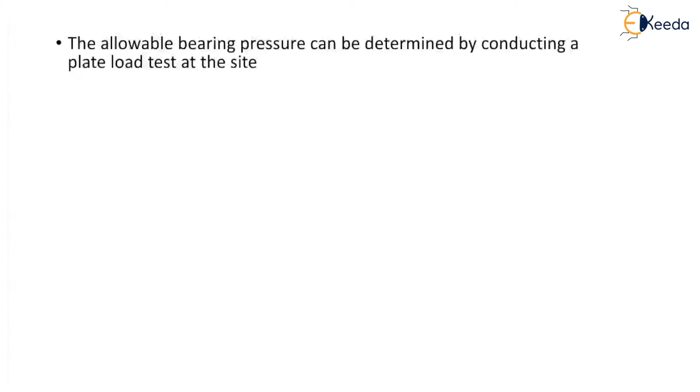The allowable bearing pressure can be determined by conducting a plate load test at the site.

To conduct a plate load test, a pit of size 5 BP into 5 BP is excavated, where BP is the size of the plate. It is excavated to a depth equal to the depth of the foundation, which is equal to DF. The size of the plate is usually 0.3 meters square.

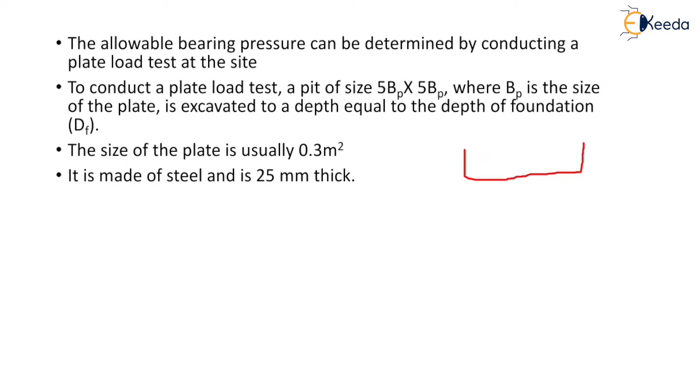It is made up of steel and is 25 mm thick. A central hole of size BP by BP is excavated in the pit.

The depth of the central hole is obtained from the following relation: dp by bp is equal to df by bf. That means dp is equal to bp by bf into df, where bf is the width of the pit and bp is the size of the plate.

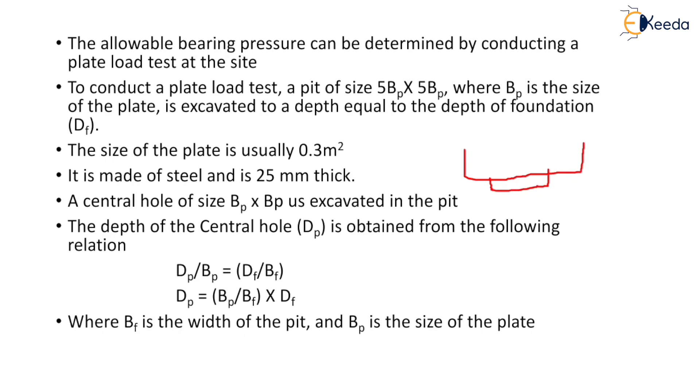For conducting the plate load test, the plate is placed in the central hole and the load is applied by means of hydraulic jack. Here in this figure, we can see that the load is applied by the hydraulic jack.

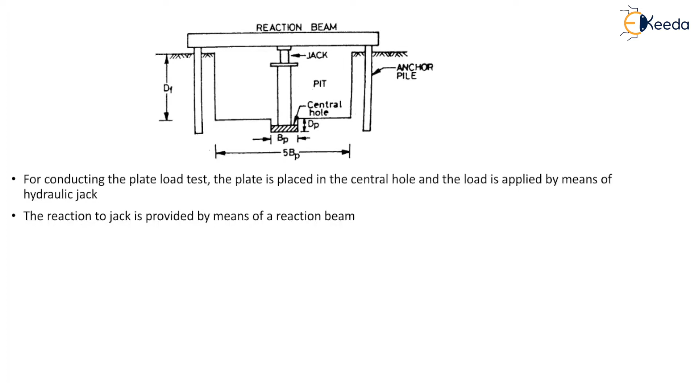The reaction to the jack is provided by means of a reaction beam, which is provided at the top and is supported by columns on either side of the pit.

Sometimes trusses are also used instead of reaction beam to take up the reaction. Alternatively, a loaded platform can be used to provide reaction.

A seating load of 7 kN per meter square is applied first, which is then released after some time.

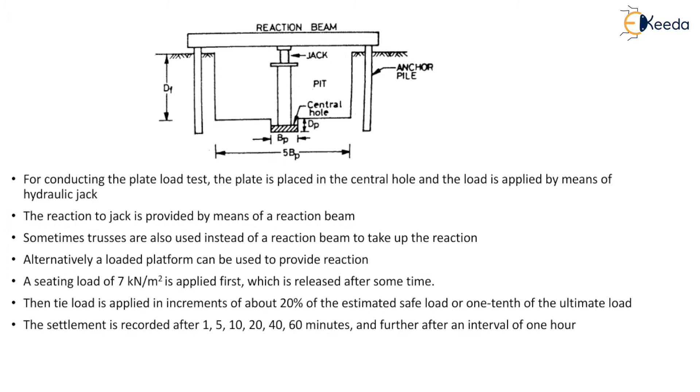Then the load is applied in increments of about 20% of the estimated safe load or 1/10 of the ultimate load. The settlement is recorded after 1, 5, 10, 20, 40 and 60 minutes and further after an interval of 1 hour.

Thus, hourly observations are continued for clayey soils until the rate of settlement is less than 0.2 mm per hour. The test is conducted until failure or at least until a settlement of 25 mm has occurred.

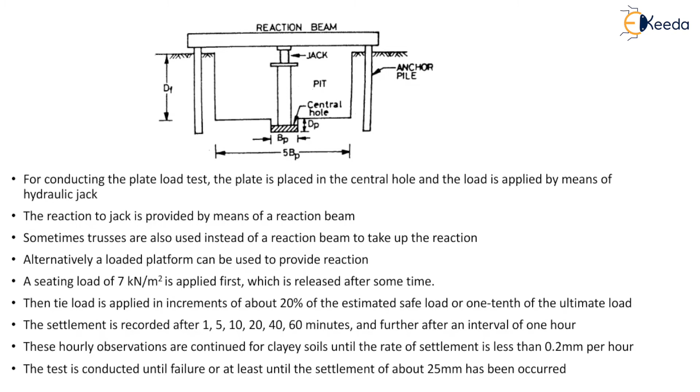The ultimate load for the plate, denoted as QUP, is indicated by a break on the log-log plot between the load intensity Q and the settlement S.

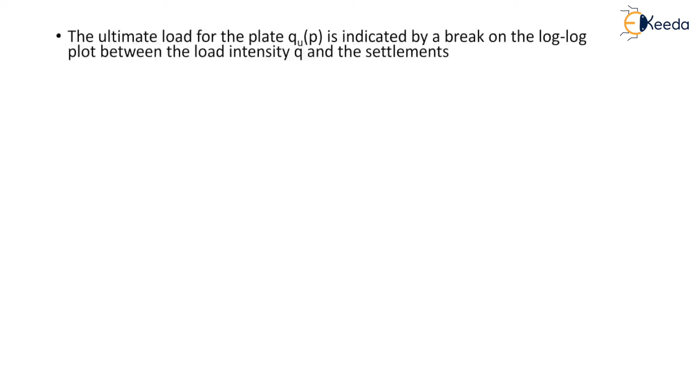If the break is not well defined, the ultimate load is taken as that force corresponding to settlement of 1/5 of the plate width, which is BP.

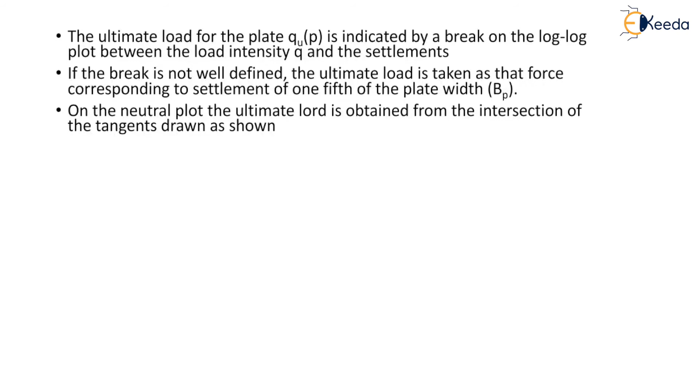On the neutral plot, the ultimate load is obtained from the intersection of the tangents drawn as shown. This is the load settlement curve where the x-axis indicates Q and the y-axis indicates settlement S, and the ultimate load is indicated by point QU, which is obtained by the intersection of these two tangents.

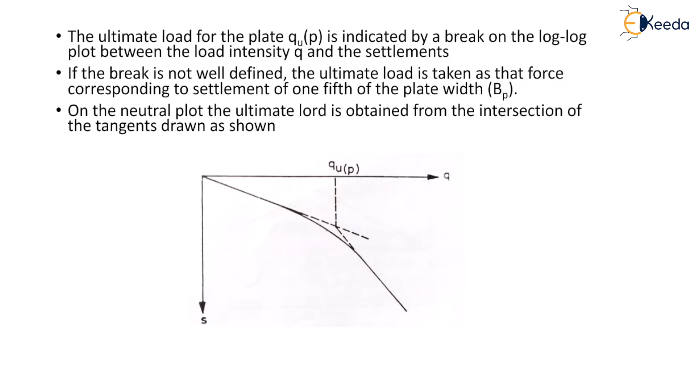Now let us discuss the uses of plate load test. The first use is that the ultimate bearing capacity of the proposed foundation can be obtained using plate load test, and for that the following relations are used.

For clayey soil, QUF is equal to QUP, that is the ultimate capacity of plate obtained is equal to the ultimate bearing capacity of the foundation. And for sandy soil,

QUF is equal to QUP into BF upon BP, where BF is the foundation width.

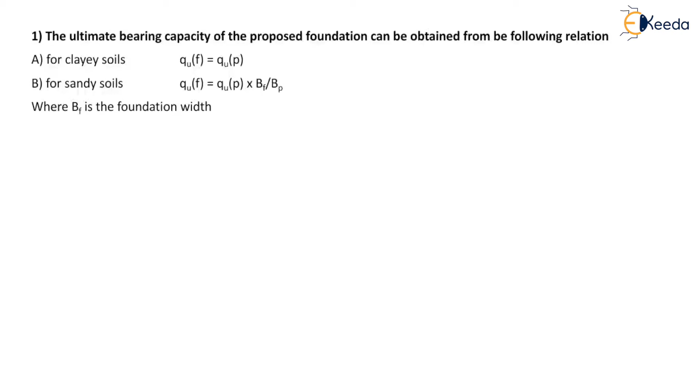The second use is that the plate load test can also be used to determine settlement for a given intensity of loading. The relation between the settlement of plate and that of the foundation for the same load intensity are given below.

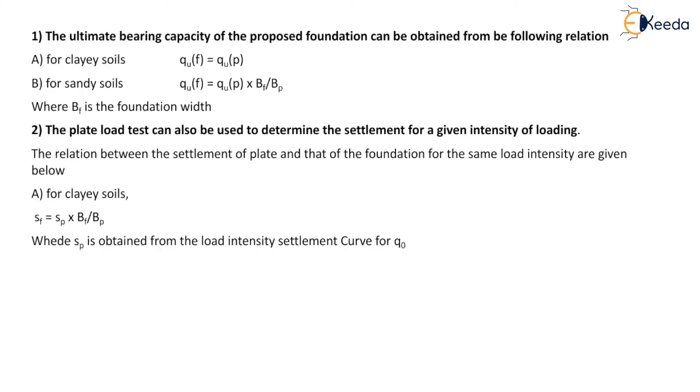For clayey soil, SF is equal to SP into BF upon BP, where SP is obtained from the load intensity settlement curve for Q0.

For sandy soil, SF is equal to SP into BF into BP plus 0.3 divided by BP into BF plus 0.3, all squared, where BF is the width of the foundation in meters and BP is the width of the plate in meters.

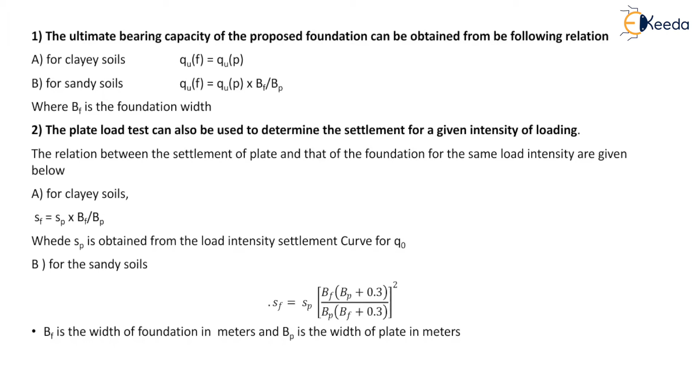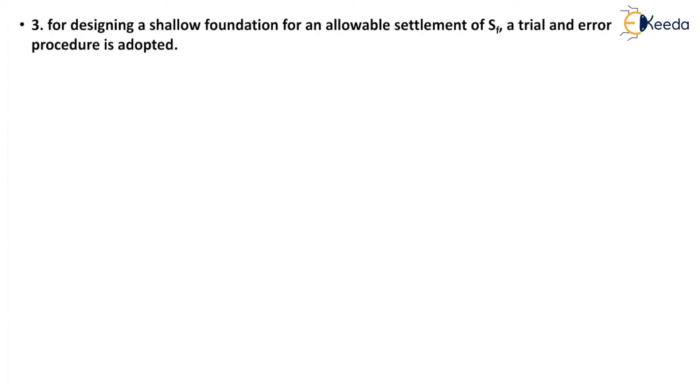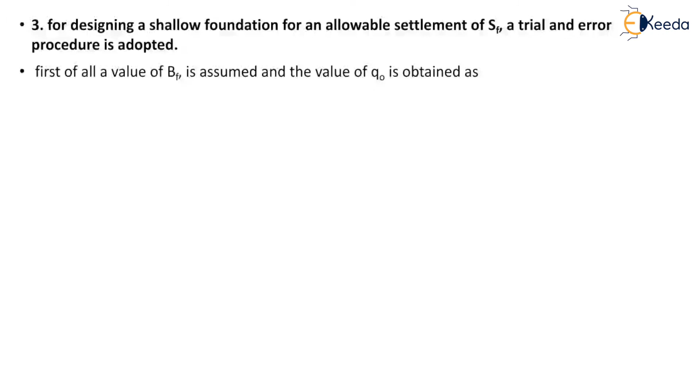The third use of plate load test is for the designing of a shallow foundation for an allowable settlement SF, and for this a trial and error procedure is adopted. First, a value of BF is assumed and the value of Q0 is obtained as Q0 equal to Q upon AF, where AF is the area of footing and Q is the load.

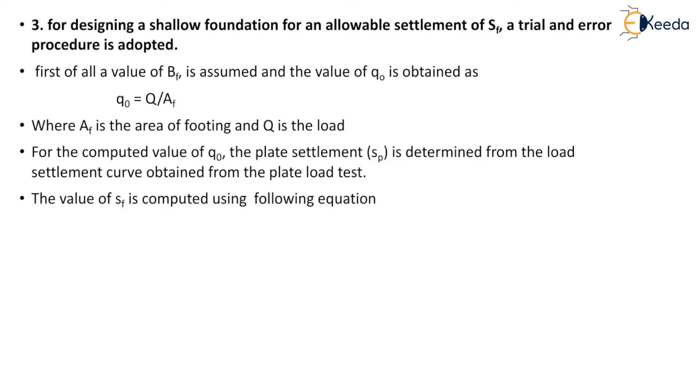For the computed value of Q0, the plate settlement SP is determined from the load settlement curve obtained from the plate load test. The value of SF is computed using the following equation: SF equals SP into BF by BP. For sand, the equation is SF equals SP into BF into BP plus 0.3, divided by BP into BF plus 0.3, all squared.

The computed value of SF is compared with the allowable settlement. The procedure is repeated till the computed value is equal to the allowable settlement.

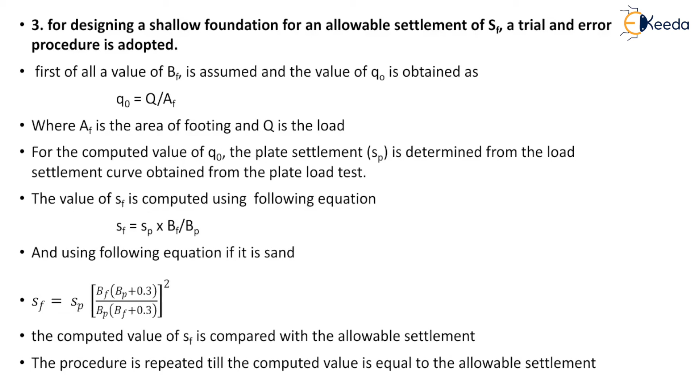The plate load test can also be used for determination of the influence factor I, using the equation S equals 1 minus mu square divided by ES into I into QB. Here the figure shows the plot between settlement and the load QB. The slope of the line is equal to 1 minus mu square upon ES into I.

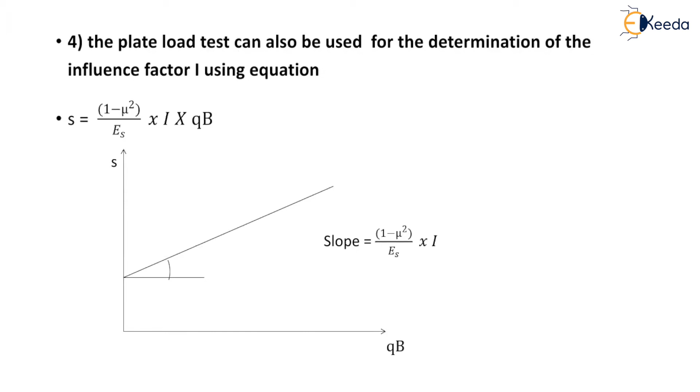Now let us discuss the limitations of the plate load test. The first limitation is the pressure bulb effect. The results of the plate load test reflect the strength and settlement characteristics of the soil within the pressure bulb. As the pressure bulb depends upon the size of the loaded area, it is much deeper for the actual foundation as compared to that of the plate.

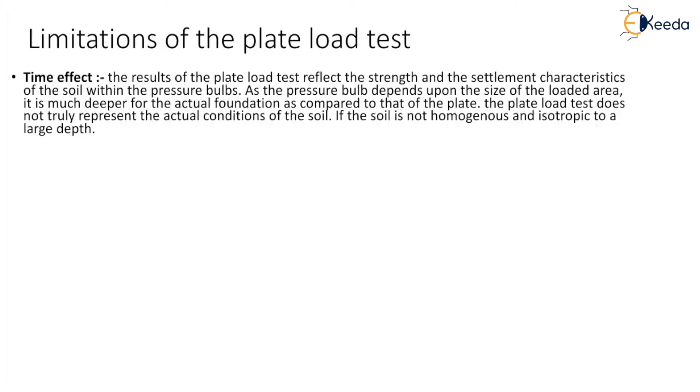The plate load test does not truly represent the actual condition of the soil if the soil is not homogeneous and isotropic to a large depth. The settlement characteristics of the soil can only be observed by the plate load test if they lie within the pressure bulb. For the plate load test, the pressure bulb is much smaller than the one for the actual footing, so the characteristics given by the plate load test, representing the smaller pressure bulb, will not be similar to the actual soil condition if the soil is not homogeneous.

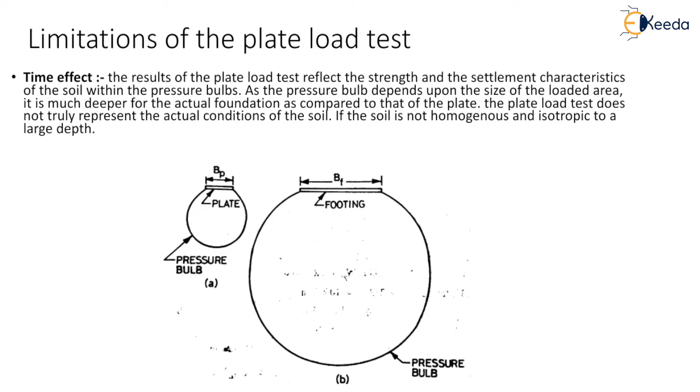The second limitation is scale effect. The ultimate bearing capacity of saturated clay is independent of the size of the plate, but for cohesionless soil, it increases with the size of the plate. To reduce the scale effect, it is desirable to repeat the plate load test with plates of 2 or 3 different sizes, extrapolate the bearing capacity of the actual foundation, and take the average of the values obtained.

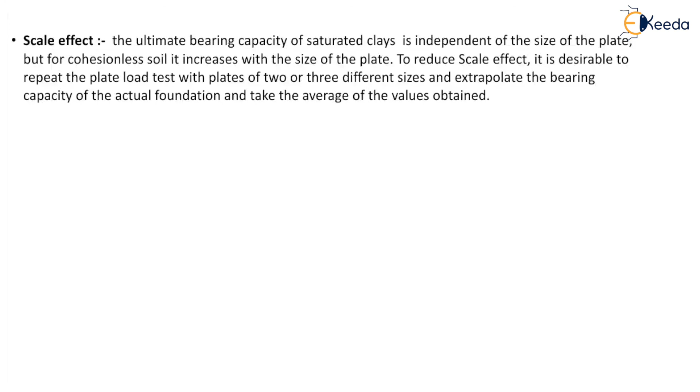The third limitation is time effect. A plate load test is essentially a test of short duration. For clay soil, it does not give the ultimate settlement, so the load settlement curve is not truly representative.

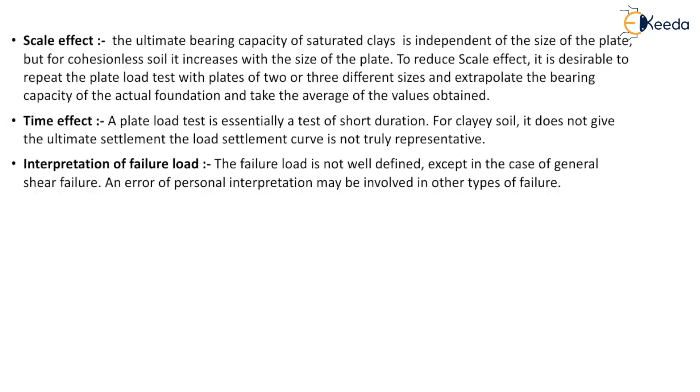The next limitation is interpretation of failure load. The failure load is not well defined except in the case of general shear failure. The error of personal interpretation may be involved in other types of failure.

The next limitation is reaction load. It is not practicable to provide a reaction of more than 250 kilonewton. Hence, the test on a plate larger than 0.6 meter width is difficult.

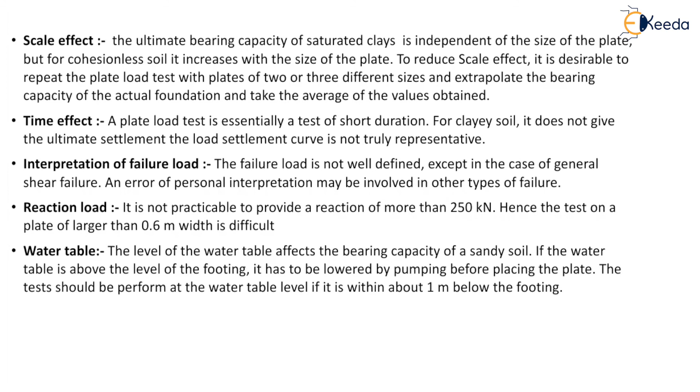The last limitation is water table. The level of the water table affects the bearing capacity of sandy soil. If the water table is above the level of the footing, it has to be lowered by pumping before placing the plate. The test should be performed at the water table level if it is within about 1 meter below the footing. Thank you.